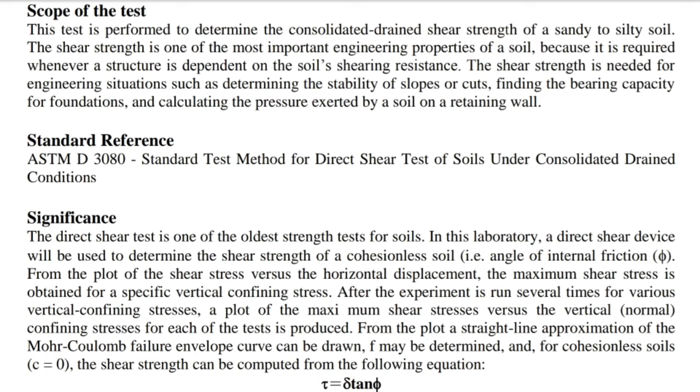vertical confining stress. After the experiment is run several times for various vertical confining stresses, a plot of the maximum shear stresses versus the vertical normal confining stresses for each of the tests is produced. From the plot, a straight line approximation of the Mohr-Coulomb failure envelope curve can be drawn. Phi may be determined, and for cohesionless soils, C is equal to 0, the shear strength can be computed from the following equation.

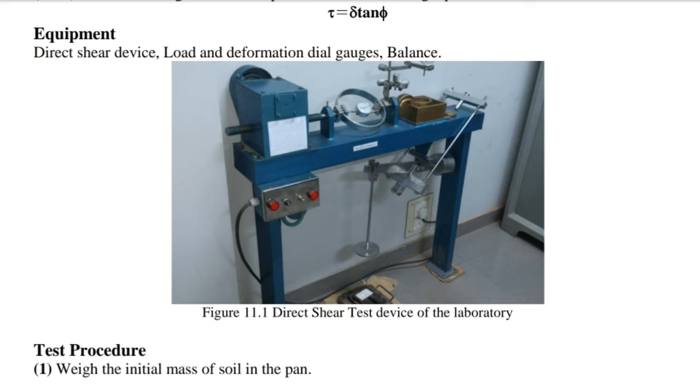Equipment: direct shear device, load and deformation dial gauges, balance. Test procedure: 1. Weigh the initial mass of the soil in the pan. 2. Measure the diameter and height of the shear box. Compute 15% of the diameter in millimeters. 3. Carefully assemble the shear box and place it in the direct shear device. Then place a porous stone and a filter paper in the shear box.

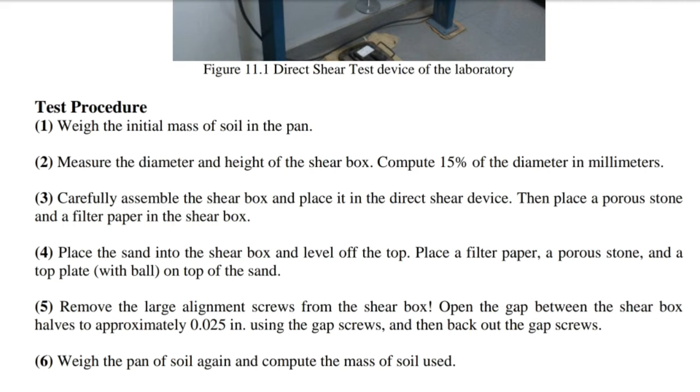4. Place the sand into the shear box and level off the top. Place a filter paper, a porous stone, and a top plate with ball on top of the sand. 5. Remove the large alignment screws from the shear box. Open the gap between the shear box halves to approximately 0.025 inch using the gap screws, and then back out the gap screws. 6. Weigh the pan of soil again and compute the mass of soil used.

7. Complete the assembly of the direct shear device and initialize the 3 gauges: horizontal displacement gauge, vertical displacement gauge, and shear load gauge to 0. 8. Set the vertical load or pressure to a predetermined value, and then close the bleeder valve and apply the load to the soil specimen by raising the toggle switch.

9. Start the motor with selected speed so that the rate of shearing is at a selected constant rate, and take the horizontal displacement gauge, vertical displacement gauge, and shear load gauge readings. Record the readings on the data sheet. Note: record the vertical displacement gauge readings if needed. 10. Continue taking readings until the horizontal shear load peaks and then falls, or the horizontal displacement reaches 15% of the diameter.

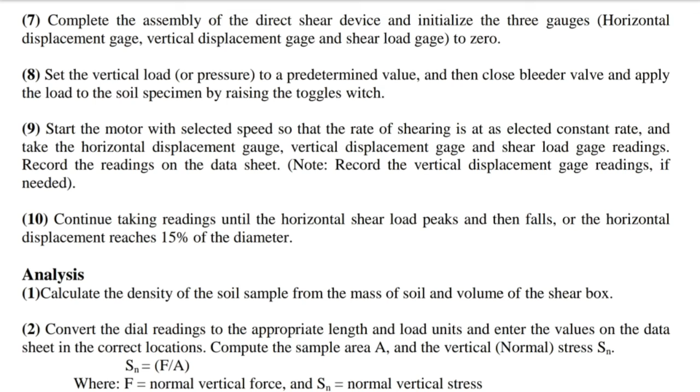Analysis: 1. Calculate the density of the soil sample from the mass of soil and volume of the shear box. 2. Convert the dial readings to the appropriate length and load units and enter the values on the data sheet in the correct locations. Compute the sample area A and the vertical normal stress Sn. Sn is equal to F by A, where F is equal to normal vertical force and Sn is equal to normal vertical stress.

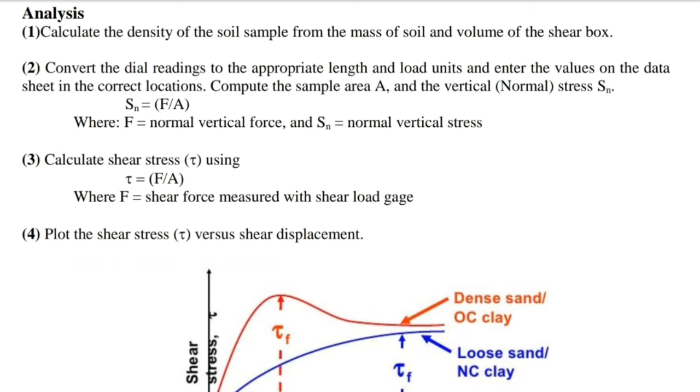3. Calculate shear stress tau using tau is equal to F by A, where F is equal to shear force measured with shear load gauge. 4. Plot the shear stress tau versus shear displacement. 5. Calculate the maximum shear stress for each test. 6. Plot the value of the maximum shear stress versus the corresponding vertical stress for each test, and determine the angle of internal friction phi from the slope of the approximated Mohr-Coulomb failure envelope.